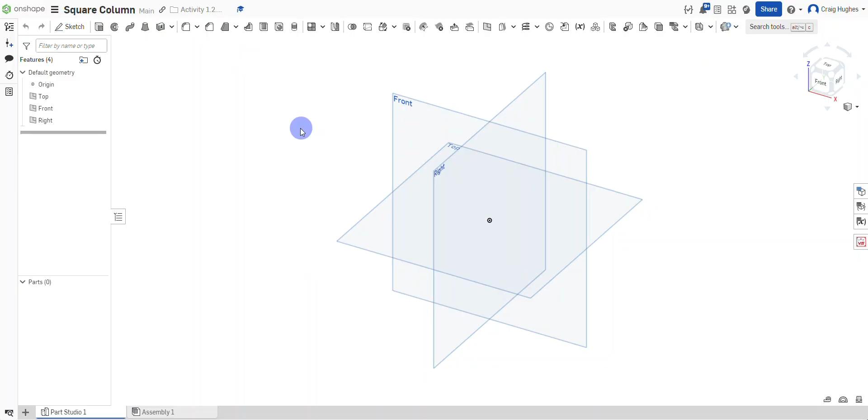I'm going to go ahead and start by creating a sketch on the top plane, and we're going to hide the other work planes just to give us a little bit less to look at. Press the N key to turn the sketch plane normal, and go ahead and grab a center point circle, clicking the origin.

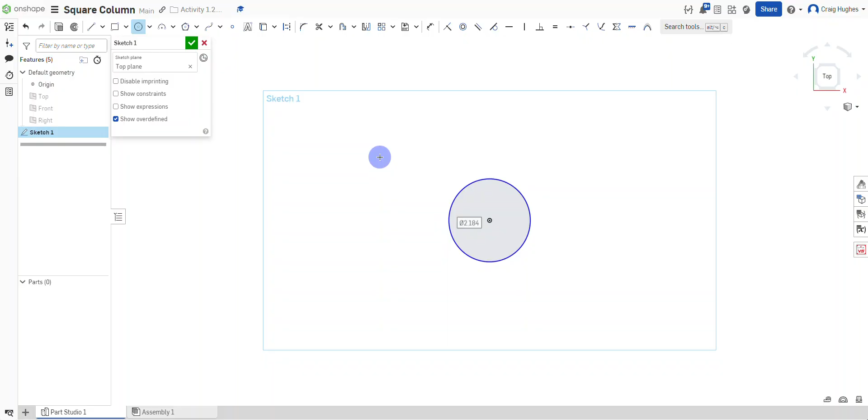The diameter of this is 1.25, and we're going to select the green check mark, moving into isometric view and extruding the circle 0.5, then selecting the green check mark. This will give us the basis of our square column here.

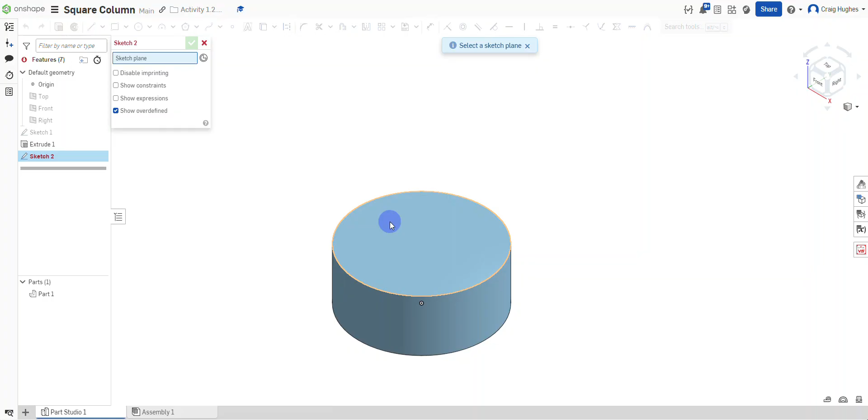As we get ready to plan what we have next, I'm going to create a sketch on top of the cylinder. Press the N key to turn us normal, click the drop down arrow and select center point rectangle, selecting the origin and then moving outward. This is also going to be a 0.5 by 0.5 measurement for the square portion in the middle.

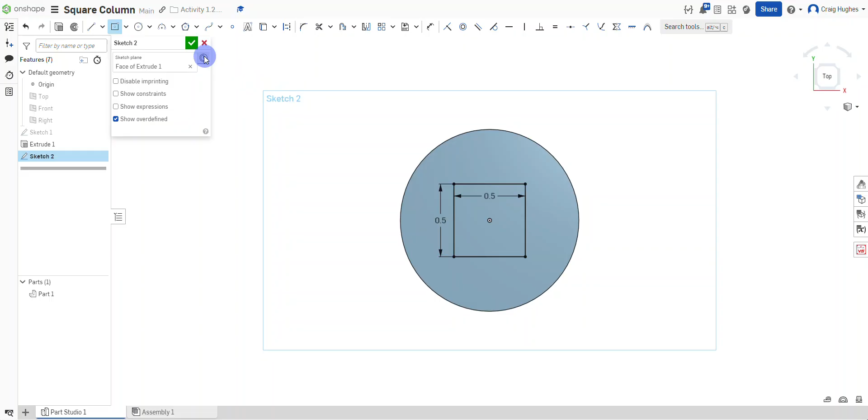Click the green check mark, change to the isometric view, and we're going to extrude this center column a distance that we end up kind of having going on here.

So I'm going to do a little bit of some math here. The total height of the column is 2.5, which we know that's way too tall, especially as we look at that. However, let's go ahead and see, hey, let's take off.

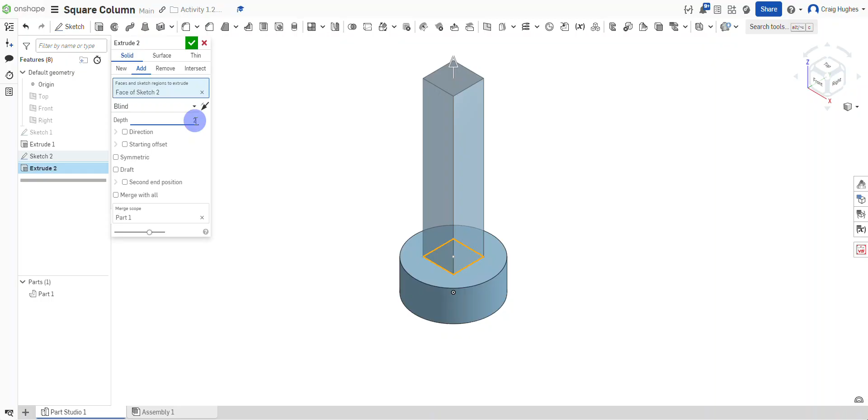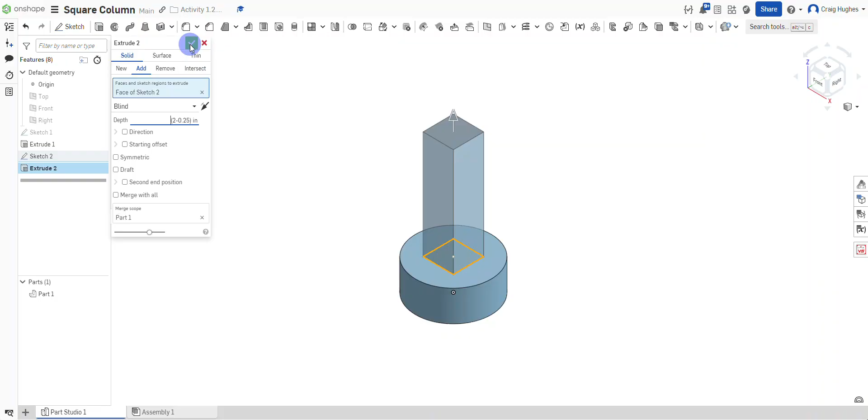So we already put 0.5, so we know that's an easy math case. We can always put 2 in there. And then the top portion of this is going to be minus 0.25. You notice that even if I type a value like a math equation in there, 2 minus 0.25, it'll actually figure out what we have left. So 1.75 is going to be the height, but just to show you the capability of what Onshape can do, that's something that we can do there.

I'll go ahead and put the square column in. I'm going to select Create Sketch, choose the top of the square, and press the N key to turn it normal.

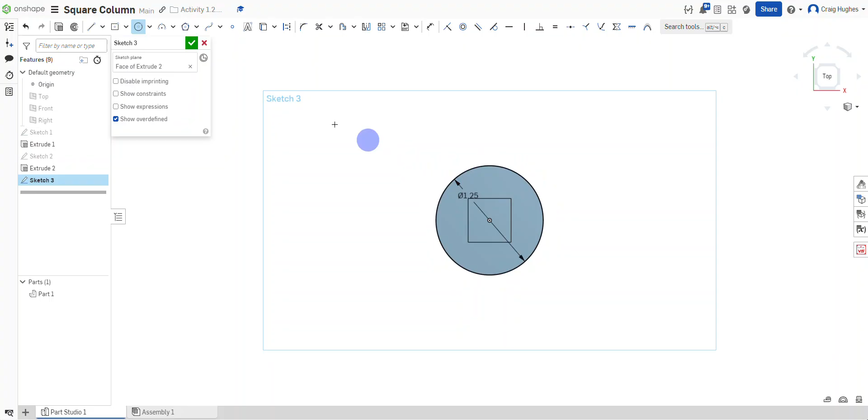I'm going to draw another center point circle, it's going to be the same as the one before, 1.25 diameter. Go ahead and finish the sketch, and extrude both portions to make sure it's completely filled. That's going to be 0.25.

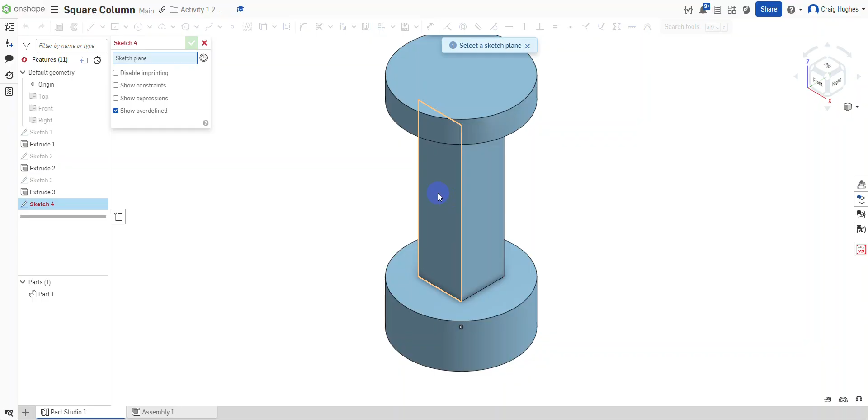The thing they have left is we're going to click on Sketch. I'm going to choose the front face of the square portion, press the N key to turn it normal, and I'm going to draw 3 circles. These circles are going to be 0.25 in diameter.

Even though we really haven't covered some of those things, I'm going to stop drawing circles. We have some geometric constraints here that can help us out. Number one is going to be something called the vertical constraint, so I'm going to select it and click on the center points of each one of the circles, so that way they will be vertically constrained together. You see now they're all moved in this case.

So I'm going to press Escape and utilize the Dimension tool. From the edge to here, they have as 0.25. As we look at distances from this edge to the center, it's going to be a 0.5. From the next center to the next is going to be 0.5, and then from the center of this one to this one is also going to be 0.5.

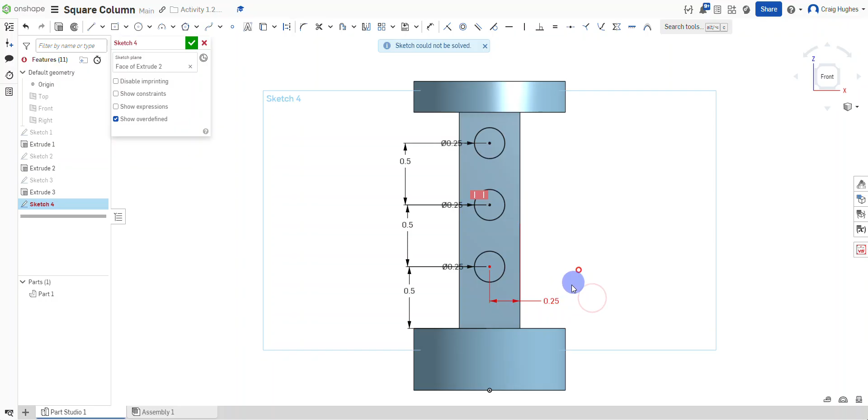What we're going to end up having is, notice how we do have a little, so I've got some red features here. Looks like it doesn't really like my 0.25 measurement. Let me go ahead and say escape dimension, and let's see if I can just delete it, and let's reapply and see what happens once I do that.

Click from this edge to here. Okay, looks like it's already kind of getting it placed at 0.25, so that's why it didn't like that. But we should be good now.

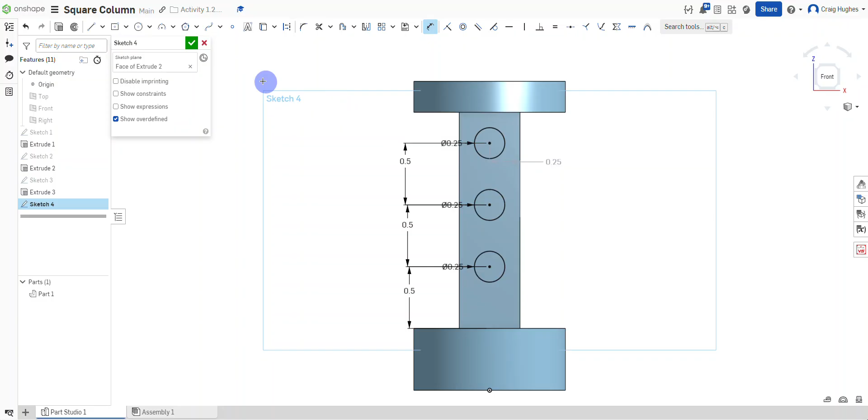I'm going to click the green check mark and place in the isometric view. Go ahead and select extrude. I'm going to pick all three of these, rotate up just a little bit, select remove, and then go ahead and choose through all for the option and click the green check mark.

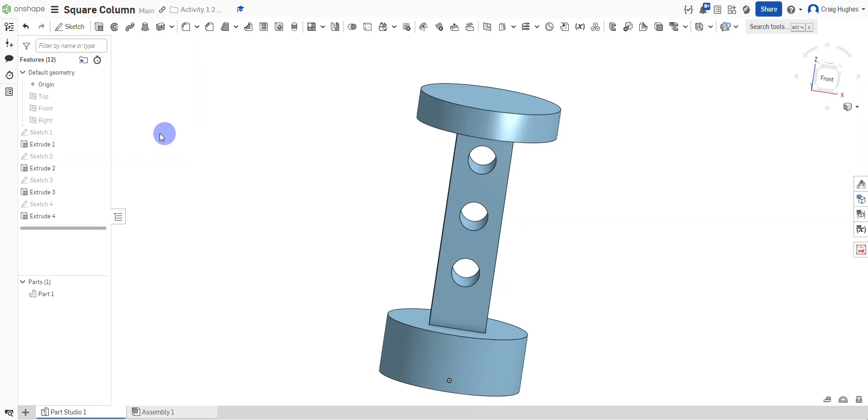Go ahead and hide the origin, and there is where we have our square column all modeled and completed for activity 1.2.5.